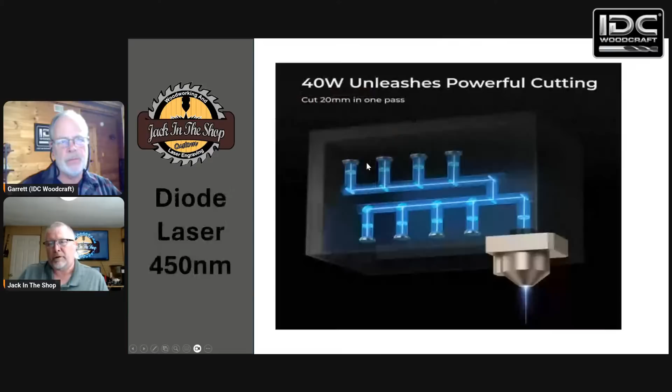And the more wattage you have, the more diodes they have to stack in here, the bigger your beam's going to be. Now most of your diodes are GRBL based. So that's the first type of laser that LightBurn can control.

GRBL based means it's like gSender or UGS, those are control softwares. Okay. Right. And diodes are good for wood, leather, dark acrylics. It can take anodizing off of aluminum, but it cannot mark the aluminum too much. Paper and cardboard. It's not good for clear acrylics. Diodes can't do anything really with clear acrylics without some sort of spray or some kind of help.

It's not going to do anything with bare metals, vinyl records, PVC, and ABS. That's a big no-no for lasers. Those materials have chlorine in them, and when you burn it, it produces chlorine gas that's highly toxic to breathe, and it will eat up your electronics and corrode all the metal in there. So you don't want to put any of those materials in any of the lasers. That's anything with PVC, vinyl.

Isn't vinyl kind of like that too? Vinyl, absolutely.

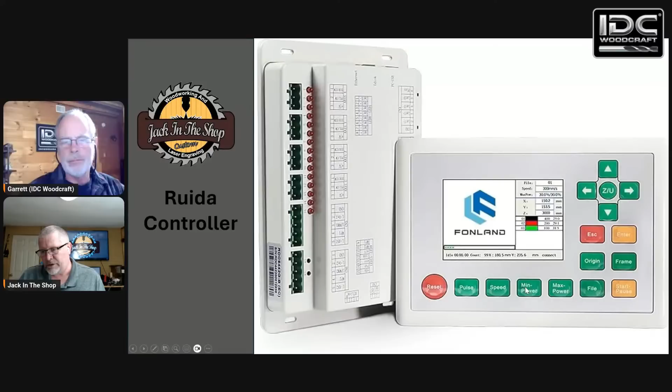And your CO2 lasers have this Ruida controller, got a little display on there, gives you a little preview of what you're getting ready to burn. You can store a ton of files on the controller itself and use this laser with no computer. You can change your speeds and your powers on the fly. We'll talk a little bit about that in a second.

It does use a glass tube in the back that has to be water cooled. So if you get a CO2, you're going to have a water tank or a chiller or something like that to keep this glass tube cool. Otherwise the tube gets too hot and it'll bust. It will burn out.

You never want to run a glass tube CO2 more than about 65% power, because that will drastically reduce the lifespan of that tube. A diode laser, you can run it 100% all the time.

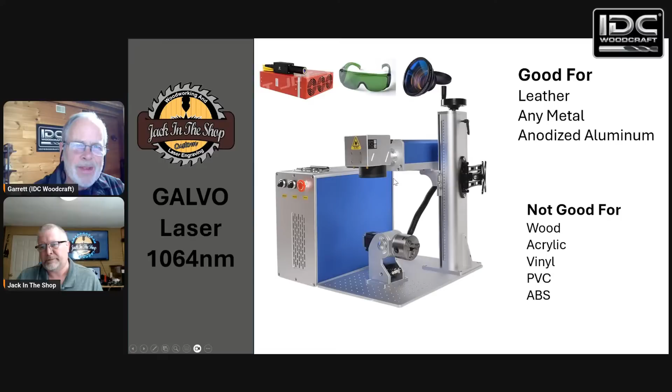Now the galvo laser, you've got a fiber source inside of this blue tower, and there's a pumped diode system, and it pumps the light through a fiber optic cable through this laser head and then into this galvanometer, and that scans your laser back and forth so fast it looks like a solid beam. It works on the 1064 nanometers.

What causes how a laser works, is it not run by diodes? What is the source of the laser itself? This is your laser source, and it is a bunch of diodes at infrared 1064 nanometers, and they're pumped diodes. They're not regular diodes, but that's what this red box is.

So nanometer is the wavelength of the light. What makes fiber lasers good for metal? Why can a fiber laser do metal and maybe a CO2 can't? That's all about this number right here, it's the wavelength. 450 nanometers will just bounce off reflective stuff, that's your diode lasers. 10,600 nanometers will also just bounce off reflective stuff, and that's your CO2 lasers. So it's all about that wavelength.

That's why everybody wants to know, what is the best laser for me to get? Well, I need to know what you're going to do with it. That's why I've got all of them, because there's no one best laser.

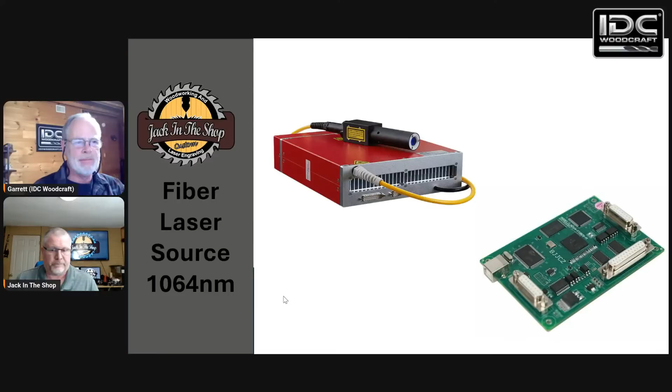Here's the safety glasses I was talking about, and they are marked with the wavelength that they will protect you from. This is the pair for the CO2 laser, marked 9,000 to 11,000 nanometers, so you can see right through those, they're clear. Again, that's all about the wavelength of the light, what it protects you from. These will not protect you from the diodes or the fibers, but they will for the CO2.

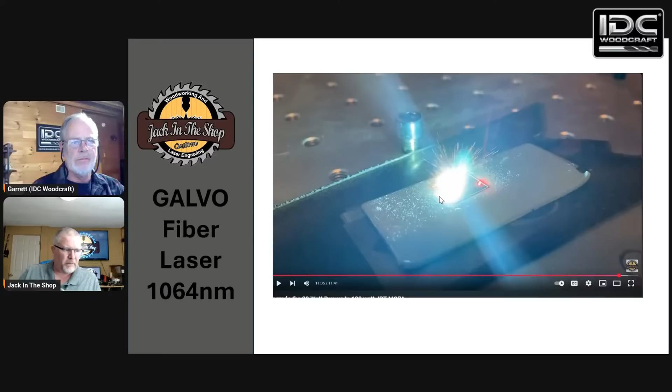So that's pretty much all I got on the different types of lasers. So what is each laser good for?

So you said with the diode it was good for cardboard, paper, leather. It can do leathers, cardboards, papers, organic material, dark acrylics, dark greens, blacks, dark blues. It will not do much with clear acrylics, it won't cut it whatsoever, it'll just go right through it.

And again, that's the wavelength. So everything about the laser and what it can do is based on a wavelength. Then, in the CO2, obviously it can cut. It will cut clear acrylics.

It's good for clear acrylics and leathers and stuff like that. And then the fiber laser, I guess that can cut as well as etch away metal. Basically, it's heating up the metal. I can cut 16 gauge steel with my fiber laser. 16 gauge, wow, that's pretty hefty. But you can increase the speed, dial the power way back, and just remove the paint off

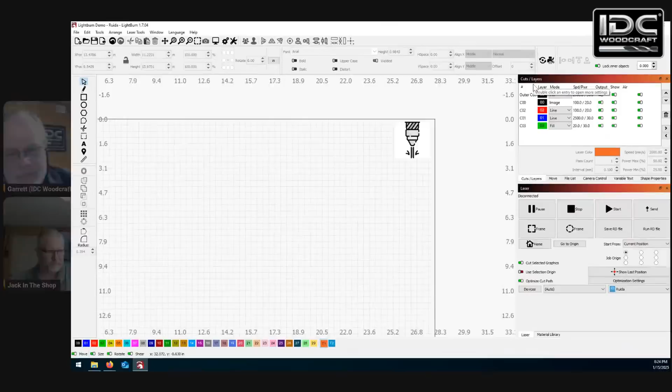Julianne, will you maximize his screen? All right, we got our cuts and layers over here. This is where you would adjust your settings. All the color on the right. Okay, you select one, double click on it, and that will bring your settings up.

I'm on the Ruida machine, so the maximum on this CO2 is like 400 millimeters a second. But if I'm going to engrave, usually it's at like 300. 60% power is about as high as I'd ever want to go on my CO2 laser tube.

Okay, and is that also for cutting or for etching? 300 millimeters a second, that will be for engraving. You can tell that by the fill. If we want to cut, we would move this to a line, and we would greatly reduce that to like 8 millimeters a second.

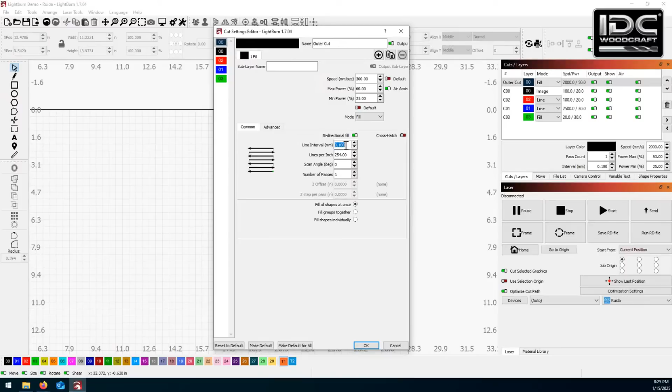Okay, just like on the CNC, on the bits, we have a step over. On the laser, we have a line interval, lines per inch. I got mine set to, and I usually engrave everything at like 0.1 millimeters for the CO2. Okay, so that's the equivalent of the step over, basically. Correct, if we were to compare apples to apples.

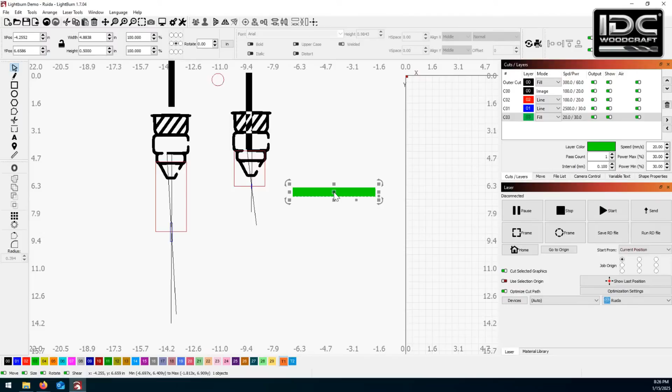And the difference between the lenses, the focal distance, is another important aspect. I've got 2 laser nozzles here drawn out, and I'm going to use this green rectangle to represent our material. We're going to pretend that this is a light beam coming through the nozzle. Once it hits this point right here, that's where the lens lives.

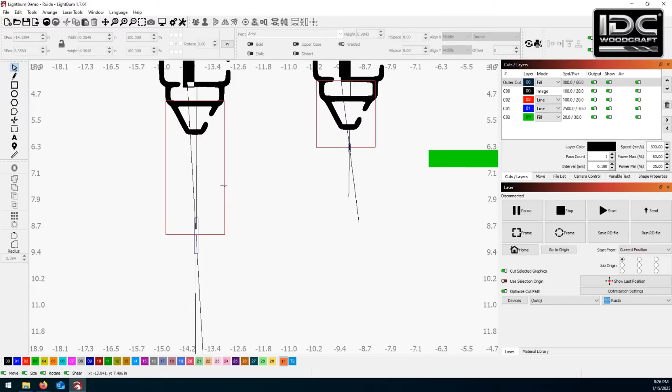That lens is going to focus that light into a cone. The distance from the lens to where that beam makes the sharpest point right there, that is the focal length of the lens. This one right here happens to represent a 4-inch lens. If we put our material on there, we would typically set our material right in that focal length.

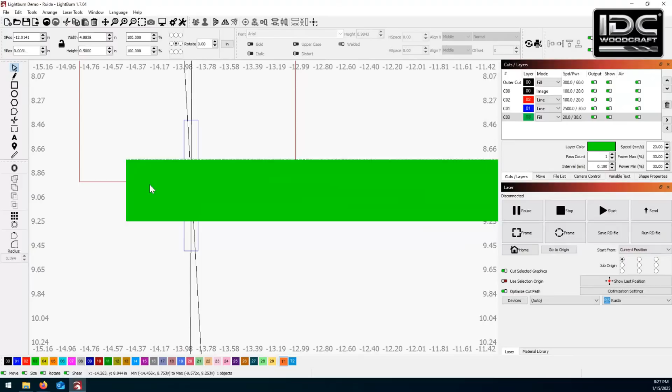I've got a blue box here to represent the effectiveness of that beam. So if I wanted to cut that material, I would actually focus the focus point to the middle of the material. That'll give me the sharpest cut on the top and bottom.

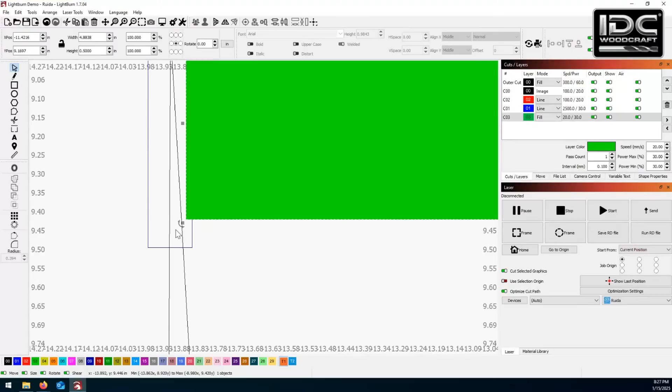So if I come down way down here, you can see that where the light exits the material is a lot wider, so your kerf would be a lot bigger at the bottom. That's why a 4-inch lens is really good for cutting. Most of them come with a 2-inch lens, and they're really good for engraving.

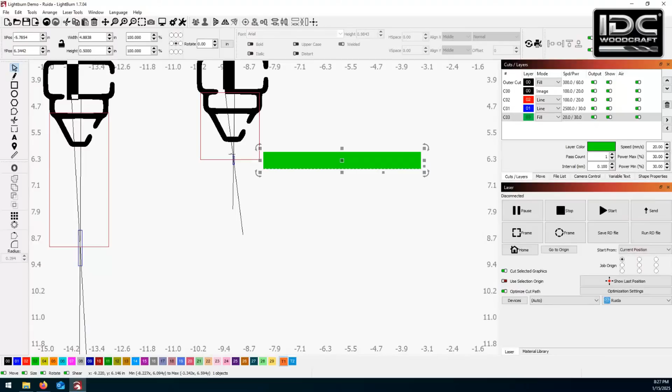When you're saying 4-inch and 2-inch, that's the distance from the lens to where the beam makes its sharpest point. All these lenses are 18 millimeters in diameter, and they're interchangeable. A 2-inch lens would not have as long of an effective area to cut. That's the difference in your focal length, and that would kind of be like your depth of cut on a CNC.

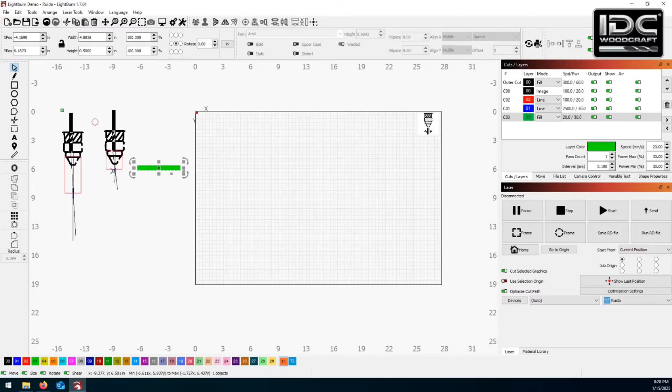But, did I just confuse you? No, that made sense to me. That's changing the focal length over the distance.

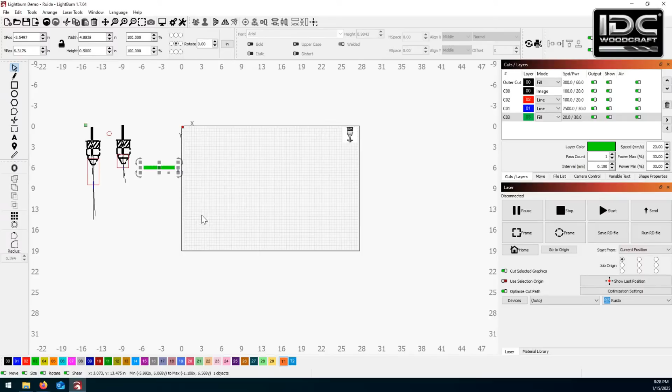Say a 1/4-inch piece of whatever you're cutting, can that actually have a real difference in the cut? Yes. Well, a 1/4 inch or an 1/8 of an inch, not really, not that noticeable. A 1/2 inch and bigger, absolutely. You would notice the kerf getting bigger if you sit right on the focal point, especially on a 2-inch, because that cone comes out a lot further.

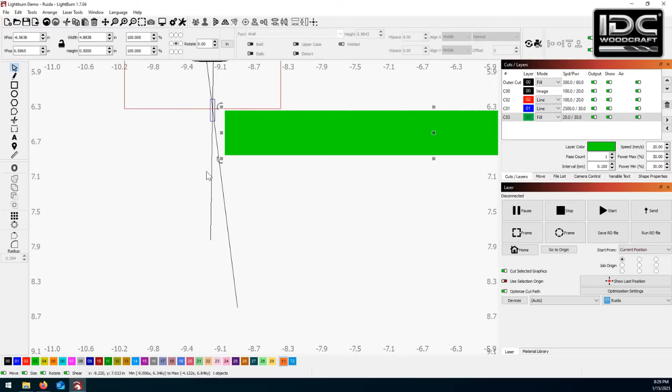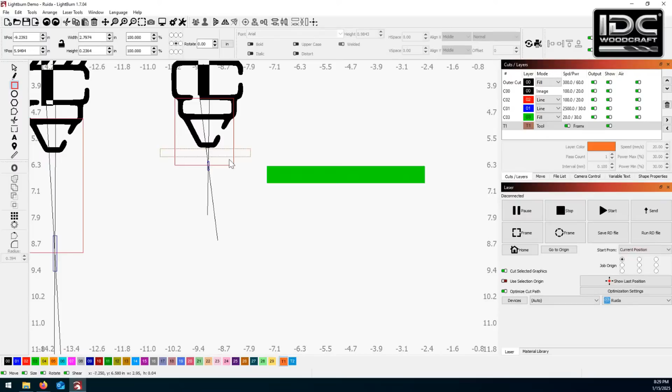How do you generally know how to set your distance? When you get a CO2, it comes with a little gauge, just a little piece of acrylic. You'll set your nozzle on top of it, and that'll sit on top of your wood, and that's how you'd measure your focal length.

In my experience, half the time those gauges are not 100% accurate, so I would do a ramp test. I'd put my material on an incline, fire the laser and run it across the material. Then I'd look at that material, find the smallest portion of that line, and measure the distance from there to the nozzle—that's how I'd find my focal distance.

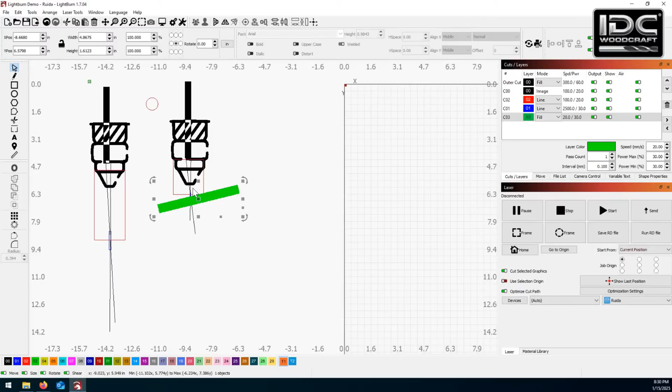Does that make sense? Yeah, it makes total sense. And once you know that number, you're figuring out the height based on where the board is at, and then you can tweak it from there.

How do you actually measure the distance once you've got that dialed in, on the board or whatever project you're testing on? Calipers. You can set your caliper—something you need to have. Absolutely. I stress it all the time.

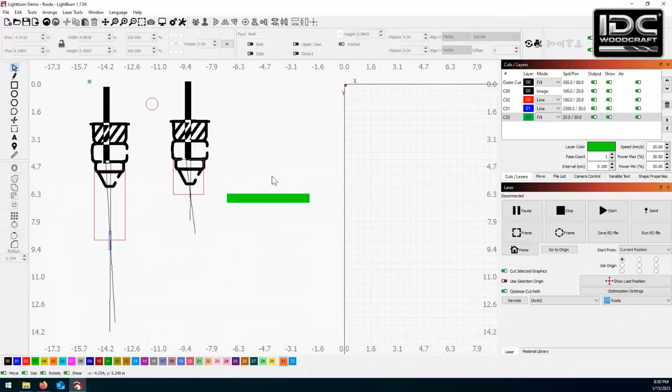If you're getting into CNC—IDC Woodcraft provides CNC router bits and teaches on YouTube—one thing I've learned is that if you're doing CNC router work, like when I started off, I was just working with a tape measure, and you can't do it with a tape measure. We need to have calipers for a lot of stuff. And now I just learned you have to have calipers for CO2 lasers as well.

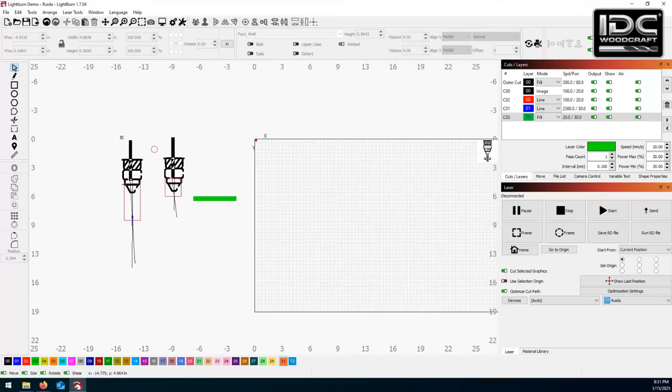Absolutely. So Lightburn in and of itself looks very different from the Vectric software I use for my router work, but it basically has all the same tools, doesn't it? It's got a lot of the same tools.

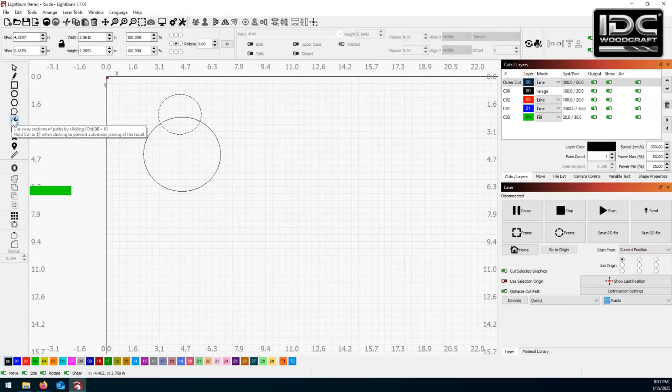I'm going to put this on a black layer just so we can see it, and make the black layer line. They just added a new tool not long ago that I really like, the trim tool. It's not quite as good as the trim tool in VCarve, but it's a whole lot better than not having anything. On VCarve's trim tool, you can click and drag up and take out everything in that path. In Lightburn, with the trim tool selected, you just hover over the line, it turns into a pair of scissors, and you can cut it away.

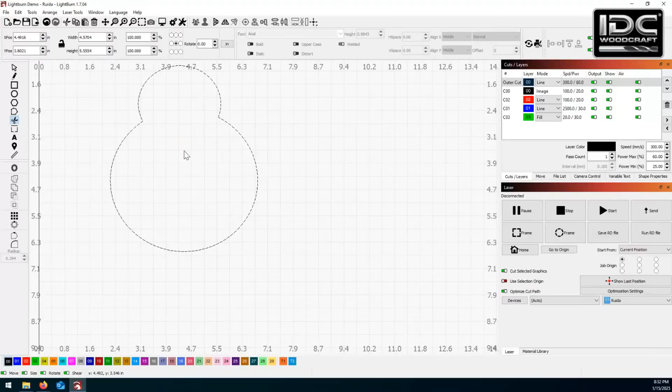Huh, so a lot of new tools. That is a new tool for Lightburn. How did you have to do that before? Well, there is a...

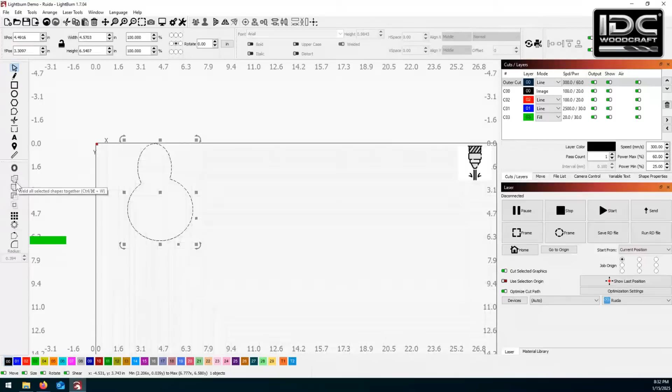So you've got these two right here. I would highlight both of these, and they have these welding tools, welding tools over here. You can use those. Sometimes you've got to go through each one to get exactly what you want. You might get different results depending on which tool you select.

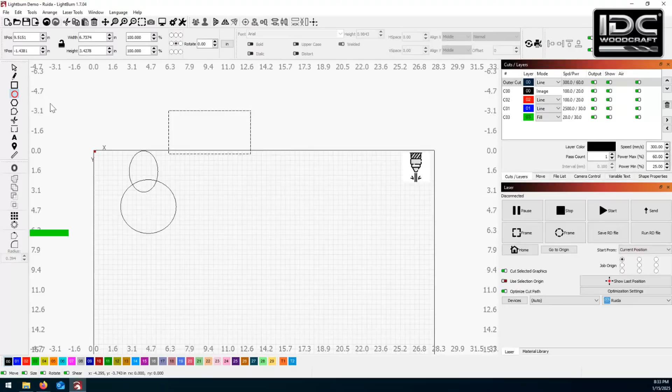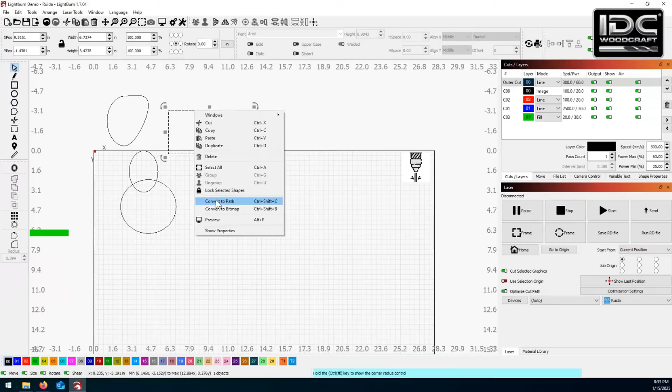I can't remember if it's like this in VCarve or not, but if you draw a shape here, that's not a vector yet, that's an object. If we select it, right-click, convert to path, now it's a vector. Now when I click on it, I can use my node tool and manipulate nodes. These won't do that because they're still objects. I have to select it, convert to path, and then I'll see my nodes.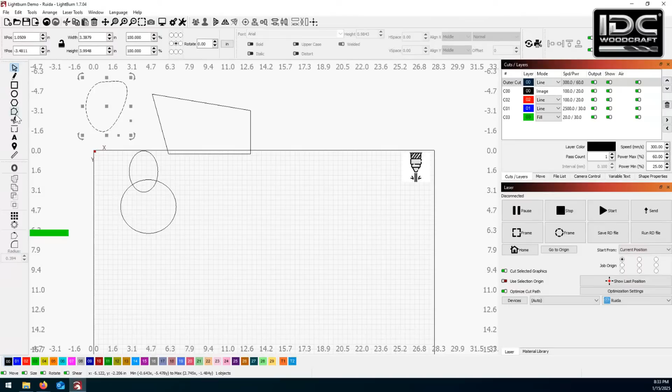So everything you draw, you have to select it to turn it into a vector that you can cut, correct? That's correct. Well, you don't have to turn it into a vector to cut it, you have to turn it into a vector if you want to edit the nodes. Okay, gotcha. But anything you draw, like all these circles and everything you originally drew, you can still select your layer and cut them, yes.

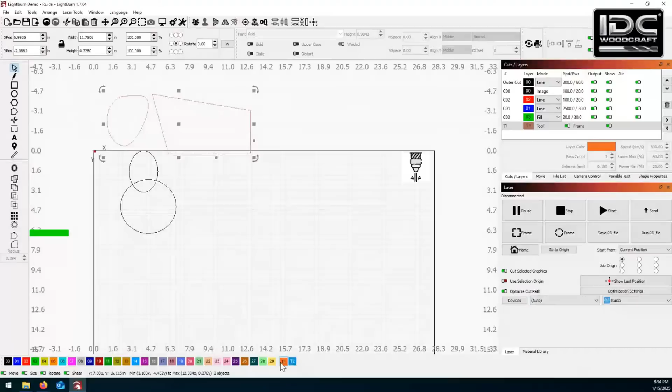Any of these colors down here are different layers, and you can assign different settings to each layer, except for these last two. If I select a couple of things and put them on T1 or T2, that's a tool layer. You can see there's no output on a tool layer. It will frame on the material, but it will not mark or cut the material. That's T1 and T2, just for alignment tools.

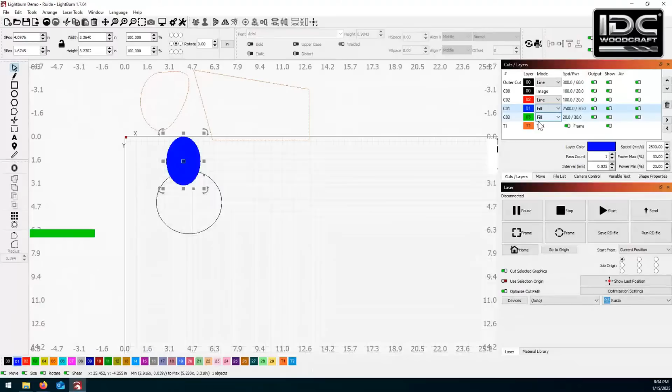And you can dictate which lines get cut. What's the proper term to use, cut, burn, what? When you see all of these open, they would essentially be lines, and then you've got fills. If you fill something, that's engraving it. If you had it set on line with the speed set real fast, it's just going to draw a line on top of the material. But if you slow it down to like 8 millimeters a second, it's going to cut that whole material out.

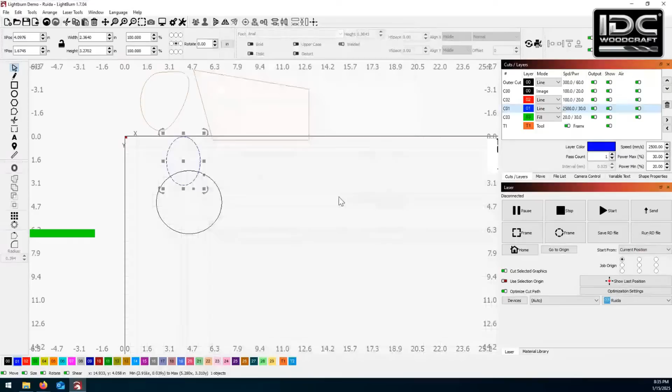Folks, I want to reiterate something you said in the beginning about safety. What are the materials that someone should never cut on a laser?

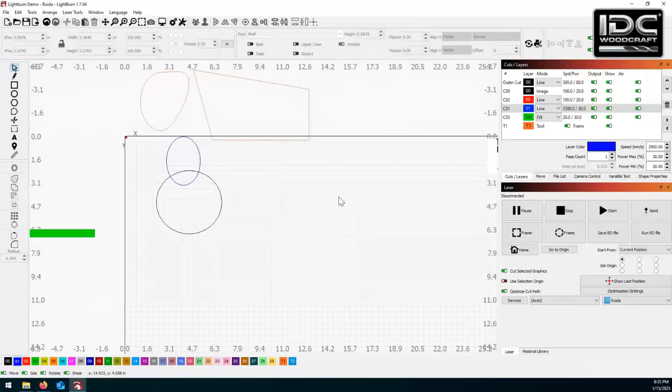Anything vinyl, PVC, ABS, or anything like that has chlorine. There's actually a test you can do to see if it's going to produce chlorine gas. I can take a heavy piece of copper wire, heat it with a torch, put it to the material I'm wanting to laser, then put it back into that torch, and if the flame turns green, that's representing chlorine gas, and you do not want to put that in your laser. Chlorine is extremely toxic, it'll kill you.

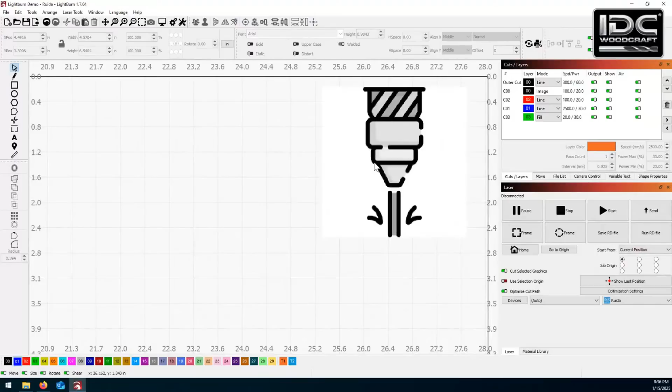I guess we all know the difference between rasters and vectors, don't we? These are now vectors. This over here is a raster. I downloaded this image off the internet just to draw up my little nozzle demonstration. And the way I got the vector out of that is with the image selected, I right-clicked on it and traced the image.

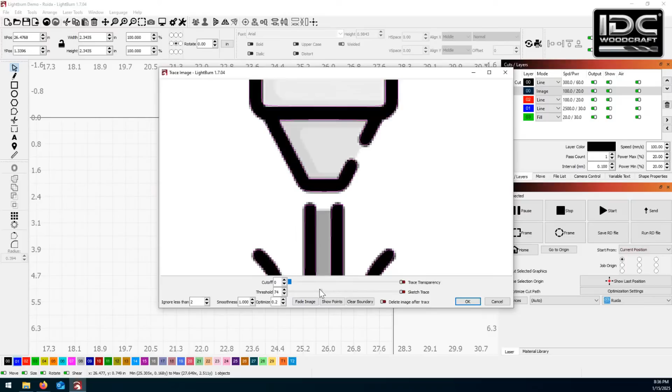Lightburn is real good at tracing images. You can zoom in on it, you've got this little slider right here, you can adjust the outcome of it. Click OK, then drag your vector out. All your vectors will be grouped as soon as you drag them out, so you can either right-click and ungroup, or come up to the toolbar and ungroup it there. So that's how you would trace a bitmap.

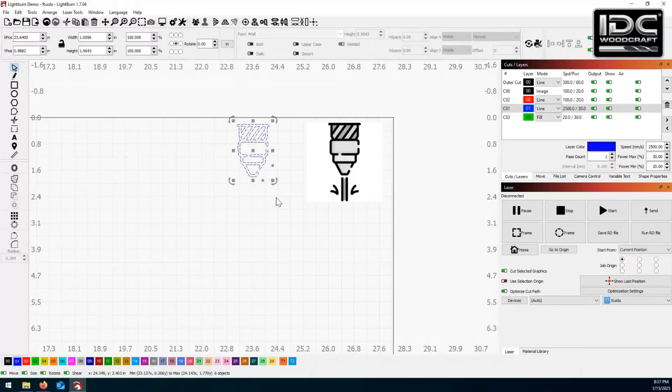Daniel said the trace in Lightburn is an excellent tool. I love the trace in Lightburn, it's better. What makes the tracing tool so good? Is it better than VCarve? I like it better than VCarve. I haven't actually used the trace tool in VCarve a lot because for decades I've always used Inkscape, and I came kicking and screaming into Lightburn, and I just got accustomed to it. It is very accurate on its trace, I can tell you that.

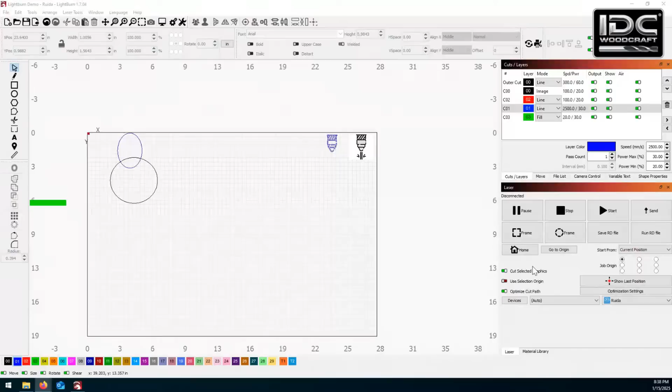One of the questions I have about Lightburn is setting your XY zero point. It's not quite the same as a CNC router, where most of them automatically home. Especially on the diode gantry machines, a lot of people say don't move the gantry by hand, use your jog buttons. Highlight your work, set it, hit the frame button, and the laser will frame out where it's going to engrave. Make sure that's within the bounds of your material. That's pretty much how you set it, using your jog buttons.

There is no actual set zero at this point. You just move the laser to that point, and when you hit start, it's going to go. You just want to make sure your material's under the cut area that it's going to be cutting.

And so that's where you use the trace. What was that tool for when the laser shows its bounds? The framing tool—it'll go at low frame power and outline where it's going to cut. This frame, like a rubber band frame, will trace out the shape, like circles.

All right, well, let's get into this. There was a question already: how much does Lightburn cost?

There's 3 different levels. I think they've actually changed it, and I'm not sure what the cost is anymore. I've had it for years and bought all 3 levels. It used to be $30 for GRBL, and it went up—I think it was $60 for Ruida—and then you had to buy it again to get the Galvo. I'm not exactly sure how much it costs now.

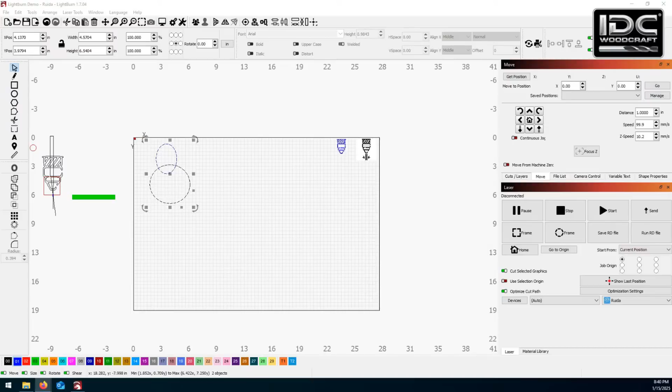What would you say is the reason for them going up in price on each tier? I don't know why they've done that, they just had it on 3 different tiers. I think somebody mentioned they have a basic and a pro version now—they've changed the structure. When you get it, they allow you to install it on 3 different computers, but if you send them a nice email, they'll give you another license so you can put it on 4 computers.

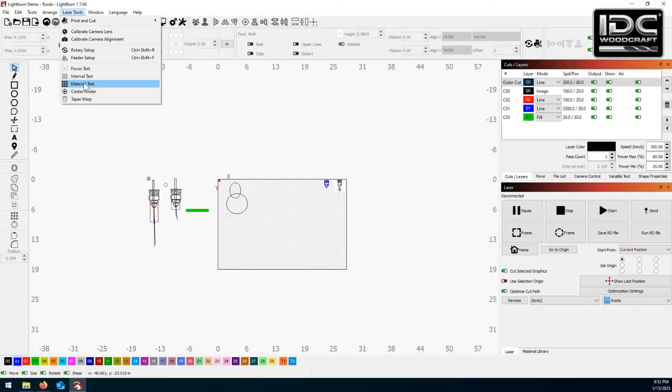Up here in the top, we got laser tools, and if you come down, you got material tests. That's going to pop that up. You can tell it how many squares you want in each direction, and pick your parameters here.

I want to start at my speeds, 10 millimeters a second. If you're going to do a test for an engrave, I'd start about 100 millimeters a second, and the maximum I'd go all the way up to 400 millimeters a second. For power, for an engrave, I'd start about 40% power on a CO2, and maximum 60%. I don't want to go anywhere over 60% on power, and that will give you your material test, and you can frame it out. That's how you do all your material tests right here in Lightburn.

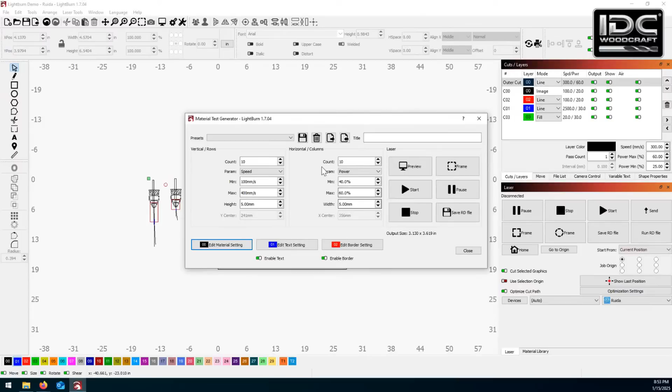Yeah, and so you should do that for everything, and whenever you're moving a machine, you should do that.

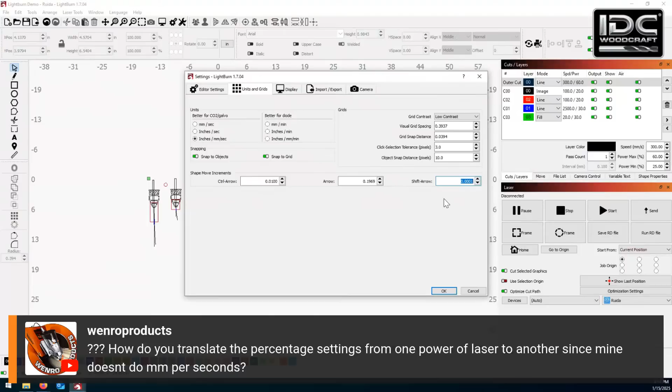There's another thing to consider here - the shape move increments. You can use your arrow keys to move shapes around, but if you hold control and use the arrow key, it moves at a different speed. Hold shift and use the arrow key, and it moves at yet another speed. Here's where you set those speeds: the plain arrow moves at this percentage, control arrow at that percentage, and shift arrow at that percentage, so you can dial in how far it moves. That's kind of like the V-carve software - you select a vector and use your arrow keys to nudge it around a bit.

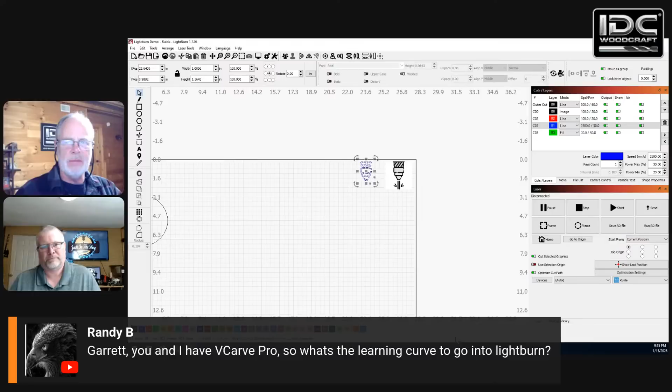Okay, I'm going to bring your screen back up for a minute, Jack. Just so you know, Lightburn in general, the drawing tools pretty much do the same thing that VCarve does. It's just configured a little bit differently.

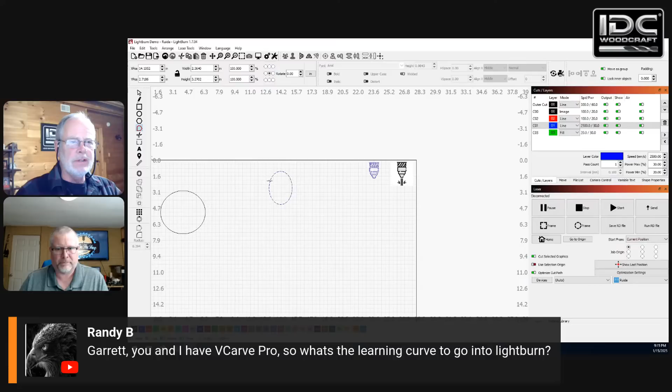Your drawing tools are all on the left there, right? Yes, it's just learning where they're at. And I guess you can place stuff specifically if you need to, is that correct? That's correct. You can break your vectors apart just like you would in VCarve and join them back together. A lot of the tools do mirror each other. It's just a matter of where they're placed.